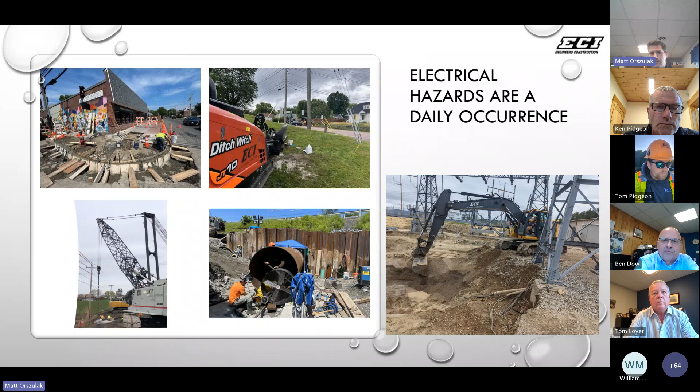Then all of our substation work and all of our excavation work that we do is having a good idea of maintaining the proper distance that we need to have, if it's the 18-inch tolerance zone or if it's 10 feet, 15 or 20 feet, aerial wise to all of our overhead power lines. So hopefully everybody gets a friendly reminder of the hierarchy of controls with electricity. Looking from the pyramid down, our most effective is lockout tagout, completely remove it.

And a lot of things that we have to do is more on bidding the work and setting up the work before we even get the project. Sometimes, like, how can we move some poles around or work with a power company to completely remove these aerial hazards, or if there's anything underground with a deep excavation, how can we relocate all these potential power lines. But for us in the field and for the purpose of this training, we're going to work on the engineering controls, awareness, admin controls, because that's something where we can really make a difference out there in the field. So again, try to isolate people, keep everybody away, maintain those safe distances.

You can add signage. It's a great friendly reminder, or put cones or barrels roughly 15 feet away from overhead power lines, and just imagine that cone, and imagine a vertical air distance from that cone, so those excavation buckets or the cranes have a reference point to stay away from all those overhead power lines. And then the safe work practice, the admin stuff, we're going to talk about our JHA in the next slide.

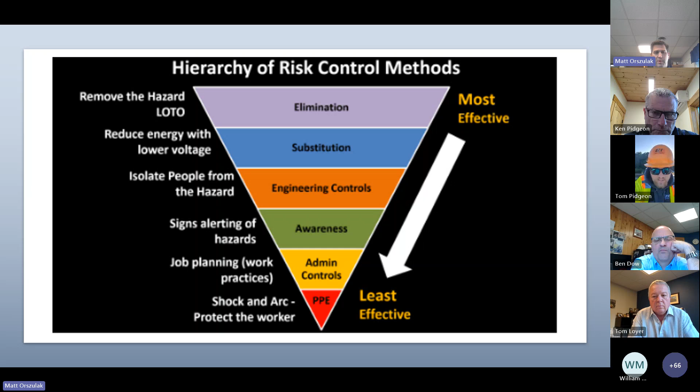And then the last line of defense again is PPE. For us, we're not qualified electricians, so we shouldn't ever really be touching it, handling it. We just have to stay away from it, make that call, keep the area safe, and stay away from any live power that might have dropped or might need to be worked on. So again, our admin controls: really, just follow our JHA when you're filling it out. The JHA is to get us thinking about safety, baking safety into our decision making, but also we've added a lot of good tips and tricks on how to mitigate and manage electricity on our projects.

So with underground utilities, we're going to be excavating, or cross boring, or drilling, whatever we're going to be doing on site. Follow that underground utilities best practice, maintaining our dig safes. Make sure we're hand digging inside those 18-inch tolerance zones. Potholing to verify the depths so we can visually see them before any cross borings or excavator bucket around any underground power. And you can always call for remarks. We can come out and help out as well.

Overhead power, if you've identified it on your job site, we have a quick little box for you. Voltage at 50 kV, try to keep 10 feet away. This is just for heavy equipment. Cranes is automatic 20 feet with our cranes. The only time we can get within that is if we've talked with the power company. And as the voltage increases, our distance also increases. And always look up before moving equipment and make sure we're utilizing spotters.

And the last is power tools and extension cords, and we just have best practices. So try to use GFCIs with all of our extension cords. All of our generators that we use out there have that. So just make sure that it's working properly, give it a test run, and do that test so it does trip, so that it's working well.

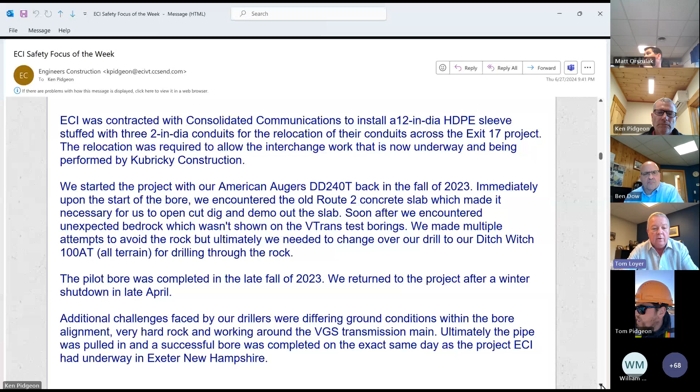So after a winter shutdown, we returned. Ken, you want to scroll? Yep. A lot of challenges were on this project, but differing conditions was probably the largest thing. We had very hard rock. We had some heavy slumping clay that created some issues for us. Obviously, bedrock, but ultimately the pipe was pulled in and a successful bore was completed, which was nice, on the exact same day as the project we had underway in Exeter, New Hampshire. So it was a good Friday for the drilling crew for sure.

And this is where I mentioned we had a couple of different attempts to ultimately get through there. Continuing on. It was interesting, Tom. We have a picture coming up of the slab that we encountered too. Yeah. We hit it before we got to the asphalt, the roadway on Route 2. Right. And on that bank, and we were fairly deep when we hit it.

Yeah. It was the old Route 2 before the bridge and the interstate was built, I guess, and the grade dropped quite dramatically from up there by Beauregard's down into that kind of basin where the interstate travels, and obviously came back up to Chimney Corners, but it was surprising that we encountered it so deep.

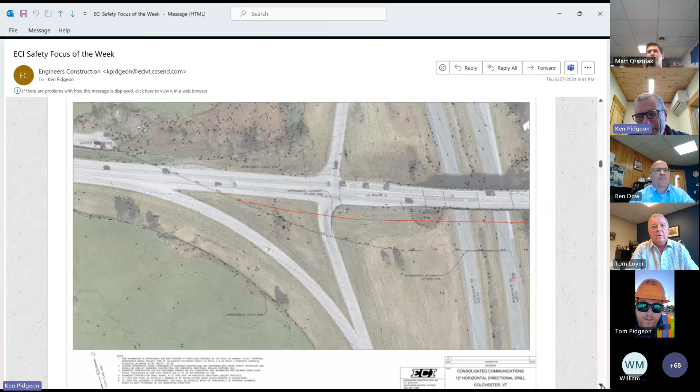Yeah, no, VTrans provided us with, I think it was like the 1950s, all their drawings from that episode before we excavated and saw what we're into. But it didn't really give a lot of detail on the elevation, but we found it for sure.

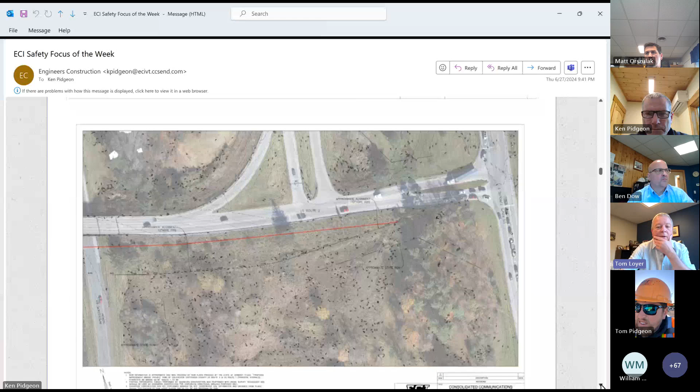So this is on the east side of the project, continuing on. The only requirements we had were to stay 8 feet away from the existing bridge abutment, and we were able to do that. The attempts we made continued to shift north, but ultimately we got through, and then we continued on to completion to an existing pole where the lines went overhead from that point.

Here's our DD 240. This machine's got longer rods, 30-foot rods, and the production was great, and we were kind of fired up to have it out there and get it moving. And obviously we ran into the concrete, but shortly after that, we ran into the rock, which required different technology.

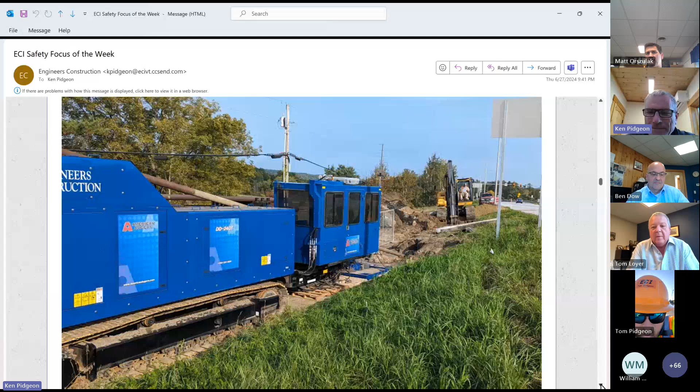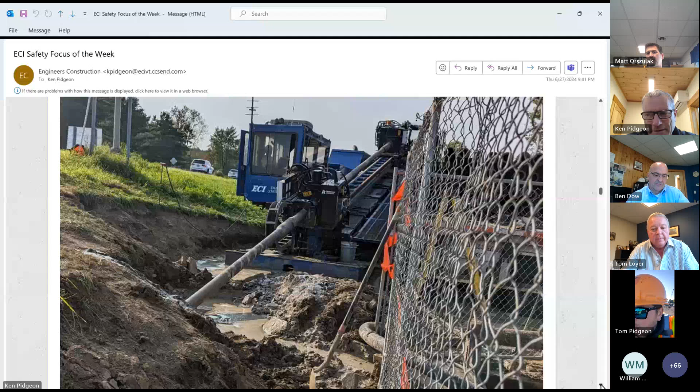Exactly. So yeah, the larger drills can get to rock with mud motors like we used in Exeter, but having what we had in the backyard with the 100 AT was the logical and economical decision for sure. Yeah. But yes, good point, Ken. Definitely, we can hit that with rock.

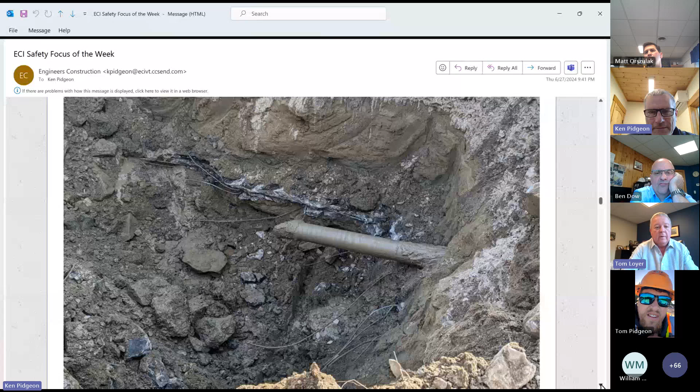Well, we were working off the embankment there. We were reaching down about 12 feet. Yeah. The profile of this bore, we needed to be 20 feet under the highway plus the topography. So we went in at a pretty good entry angle. So we were diving good at that point. I'm going to continue to scroll.

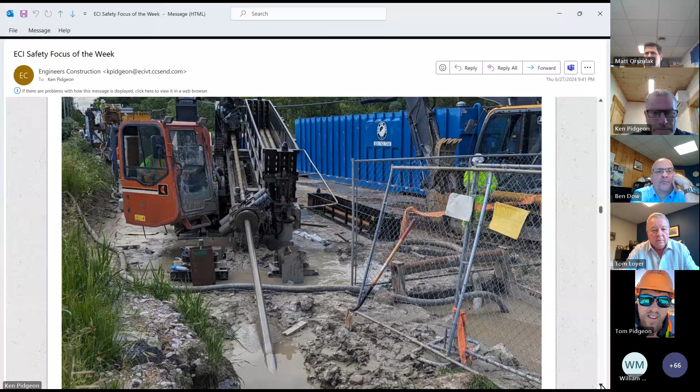Here's the 100 AT drilling out. The world of the drillers, living in mud for sure. For this project, Pat and his team got our Vermeer reclaimer back fired up, and that's the machine here with the orange pumps on it, the centrifuge units. We use that for the separation of the solids out of our mud for recycling,

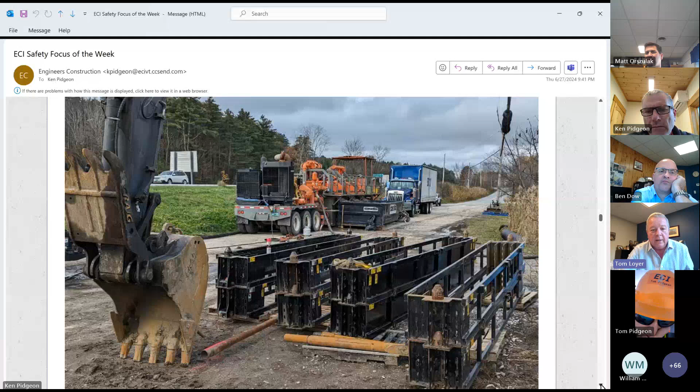and we also brought in a second pump from Tulsa Rig, much smaller than the rig that we had down in Exeter, but we were in a nice spot to have two of those units to be able to do both these jobs simultaneously. Right. There's our mud man, Ethan. The last one was I think the Tulsa Rig iron. Oh, sorry. Pardon me, Ken. Thought they were together. They were right there together.

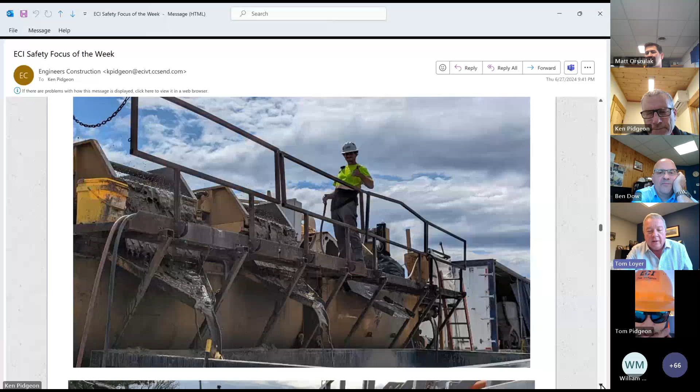So Ethan, and I just comment to our team too. The cross training that's been going on all of these rigs has been great, and this is showing Ethan Coda here. But we've got a lot of guys now working these machines.

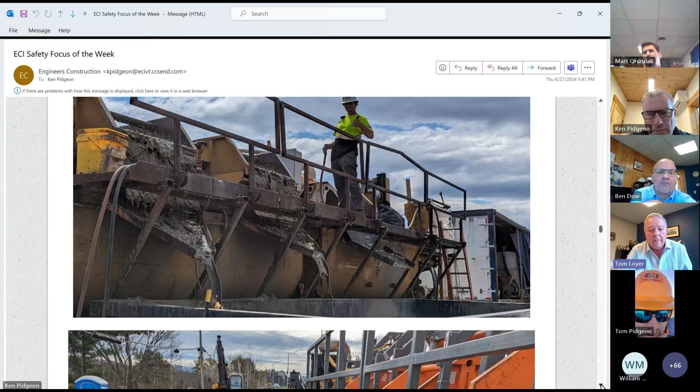Oops, went by. That's the waste end from the reclaimer. So there's different finenesses of sands that get filtered out at different stages. Yep.

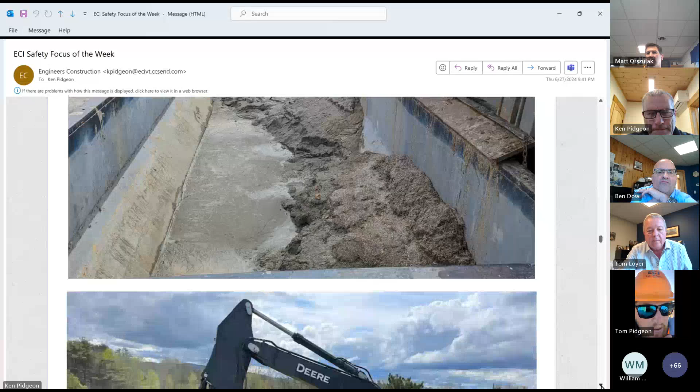I love this. It's showing really what kind of subsurface conditions we were dealing with. Yeah. If you went out there after Roger excavated that and saw the pile of rocks, I don't know if that was Bruce or Roger, but both helped out on the project. There was a massive amount of big chunky boulder out there that we worked through. Yeah, those are the toughest conditions right there. Yep.

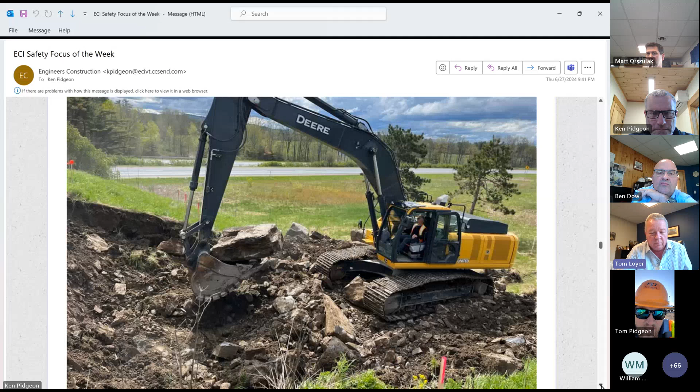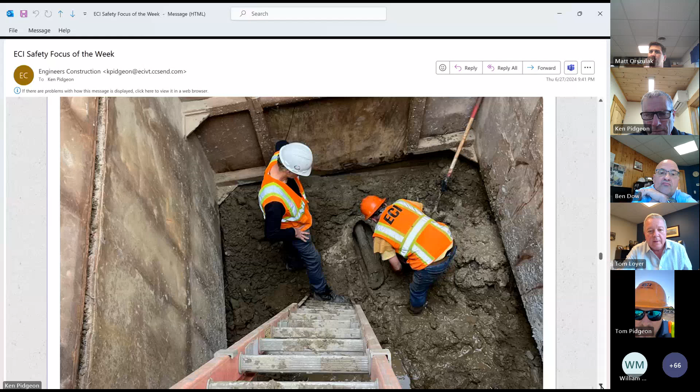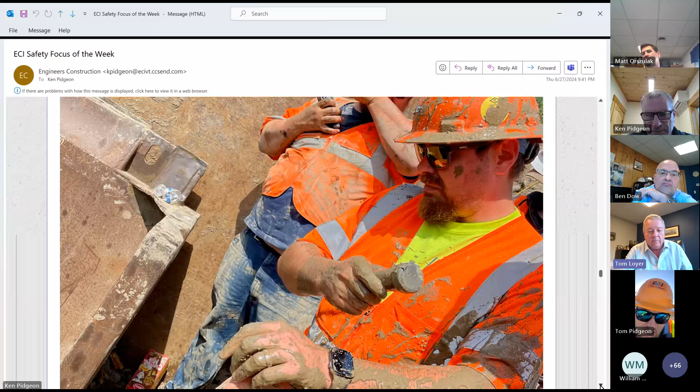This is a pin in Carter's hand that was... it never really created any issues, but we wanted to find it so it didn't create issues for us. We had some drag issues that created this open excavation for exploratory reasons, but this is a great picture. It really shows the life of a driller. Carter's head to toe mud there.

It's like a good advertisement for an Apple Watch there. Yeah, exactly.

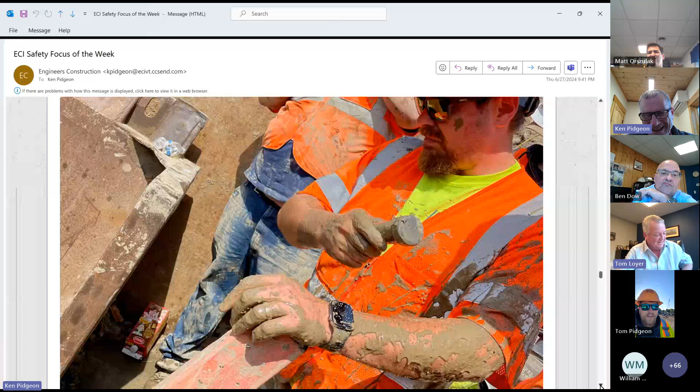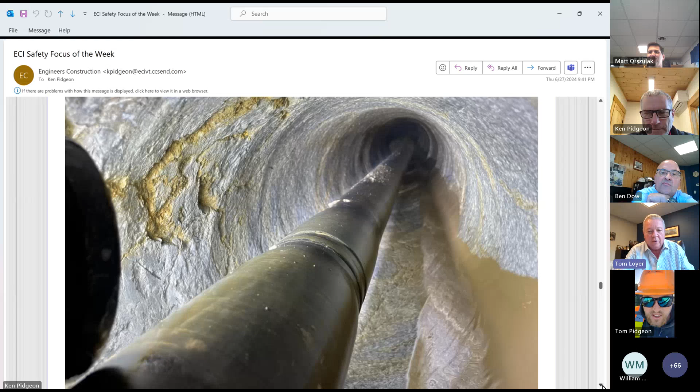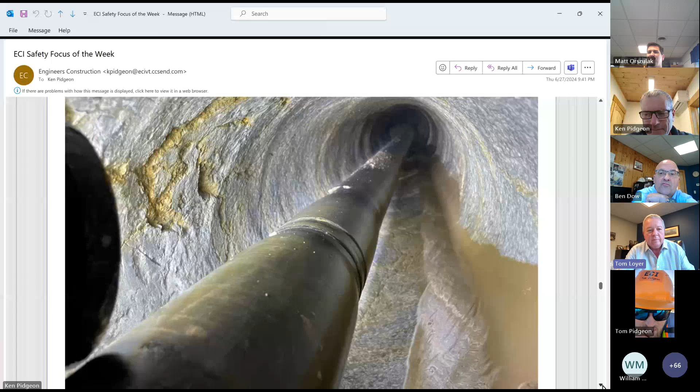And Mike Levick took this picture here. This is after we were looking for that pin, we jetted that hole, and normally our holes don't look that clean, but that shows the rock that we were cutting through, and there was a lot of it and pretty hard. It was very hard. It's a great picture. I'm gonna vote for that picture. That's pretty awesome. Yeah.

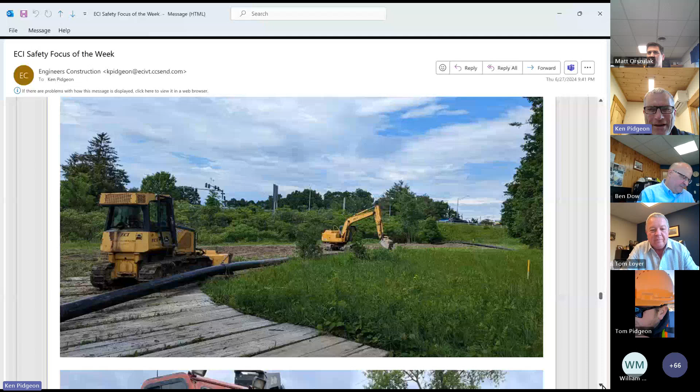At this point, I think they were about 2/3 of the way pulled back, and you see how much 12-inch line there is still laid out there even at that point. So there's a lot of pipe to put in the ground. Those are long days. Yep.

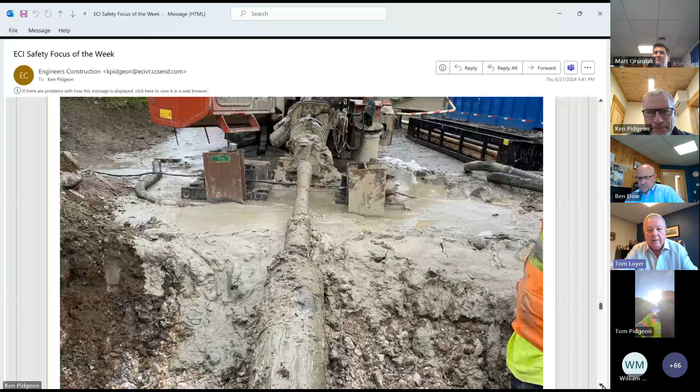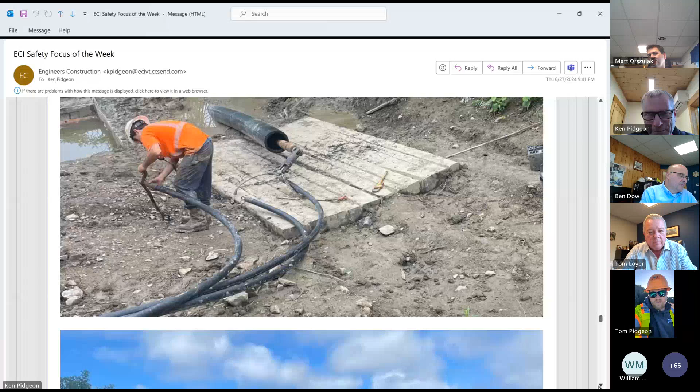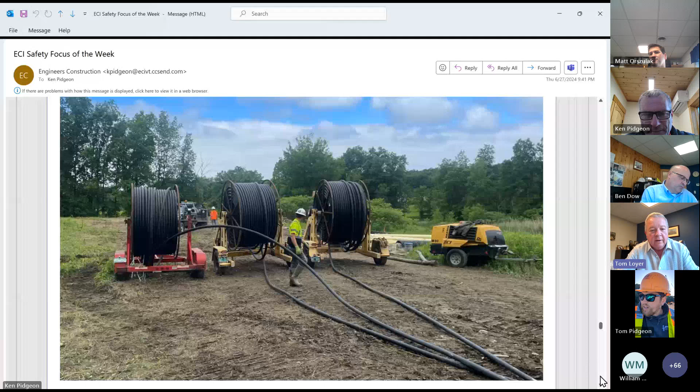So then we had to stuff the 2-inch. This is Corey getting ready to pull in the 3 2-inch conduits. Yep. So we put the drill steel with a different drill, right? Or the same drill? Same drill. Okay. Just put the straight down through steel out there and grabbed it right through the center of the pipe. Yep. Pretty slick. That makes it nice right here, having these 3 reel trailers just right up in the.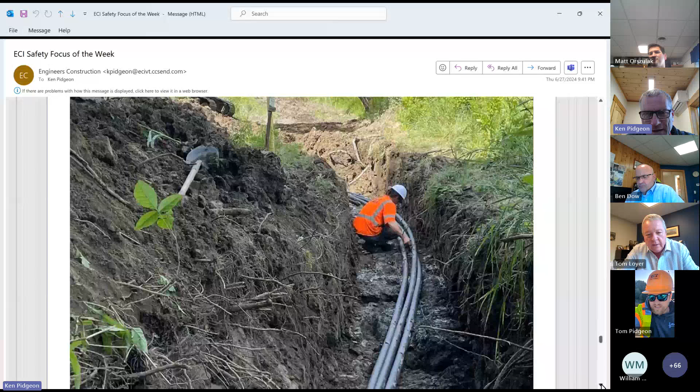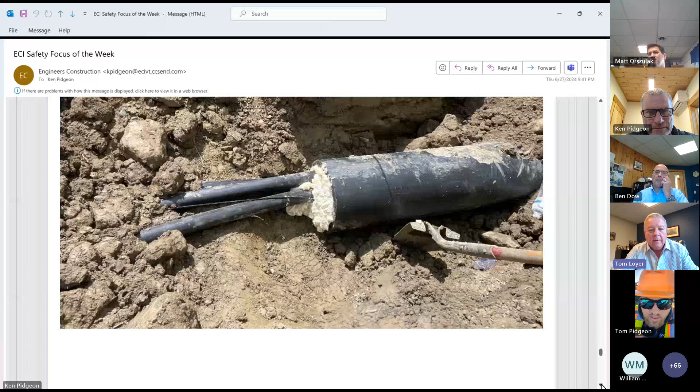And trenching in the last bit, tie-ins. That's Corey again there. And Roger helped out here. And this is just good practice here. This is the 3 2-inch coming out of the sleeve, the 12-inch sleeve, just sealing that up for future access, future use. And we also see a tracer wire here that wasn't really called for, but it was the right thing to do. We added that in. Good. All right. Well, that's what we got.

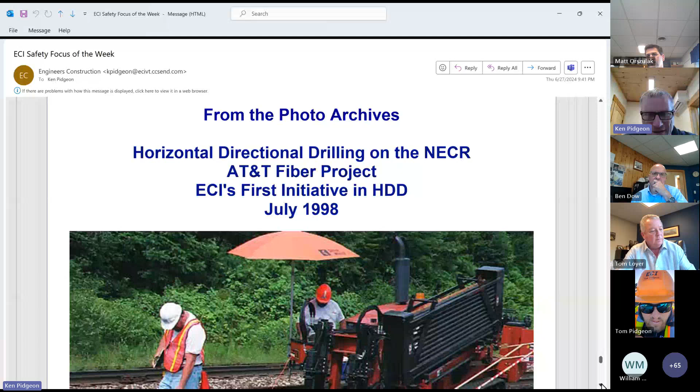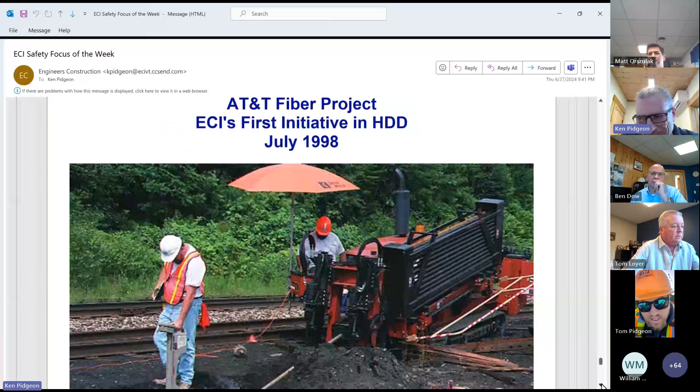This photo archive is some horizontal directional drilling on the NECR back on the AT&T fiber project. That was ECI's first initiative in HDD. That was our first drill back then in July of 1998. Hold on there, dog. So that's what I got. I'll turn it back over to the safety department.